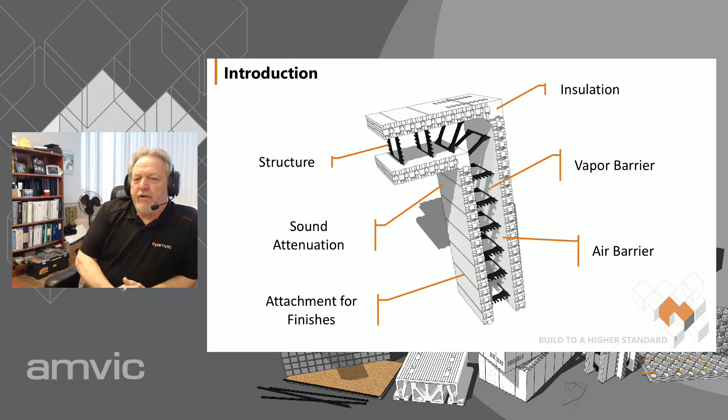Introductions. With our product, it's actually a stay-in-place form made of EPS products and the polypropylene webs. You get your structure basically from the concrete, the insulation value from the EPS on each panel, a sound attenuation, you get a vapor barrier, air barrier, and then you get the webs to fasten internally and externally.

ICF features: fire resistance, a 3-hour plus fire rating on our product, apparent sound transmission class 47 plus, thermal resistance. We have two different products. We have an R22 product and we have an R30 product. When it comes to holding to these webs, we have a 198-pound pull-out strength when using a coarse threaded screw.

We have one of the strongest factory assembled ICF with a fill rate capacity test with results of 865 pounds per square foot. Foam panel density is 1.5 pounds per cubic foot, and we have a fully reversible block with our patented form lock interlocking system, which has a full 1-inch depth.

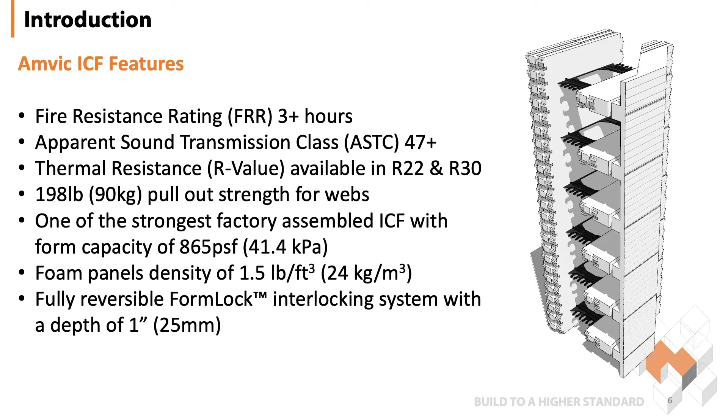R22 ICF is available in 4-inch, 6-inch, 8-inch, 10-inch, and 12-inch core sizes. The R30 forms are available in a 6-inch core and an 8-inch core. Typically, we have 45-degree corners, 90-degree corners, taper tops, brick ledge forms, and T-blocks. We can do factory cut radiuses when given the proper information.

Brick ledge extensions are available for forms that don't already have a brick ledge, and factory cut height adjusters to enable any height required on the job site. We also have accessories, and Plumwall bracing is available through Amvic.

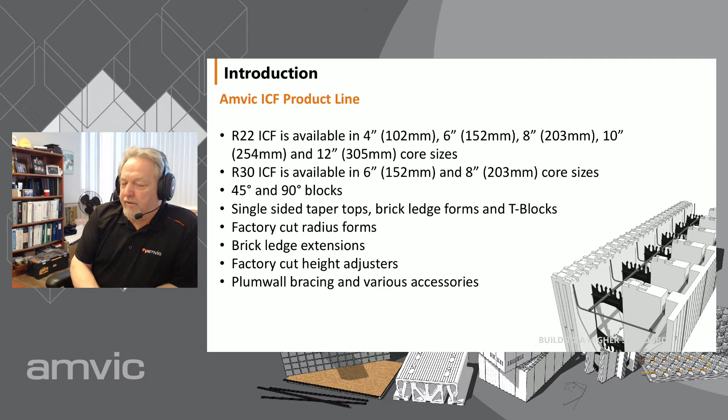45-degree block, straight form, 90-degree form. Just to give you some illustrations, a double taper top form. The T-block, we have a long and short version, which allows for the offset running bond as you go up through the build, and then our brick ledge form.

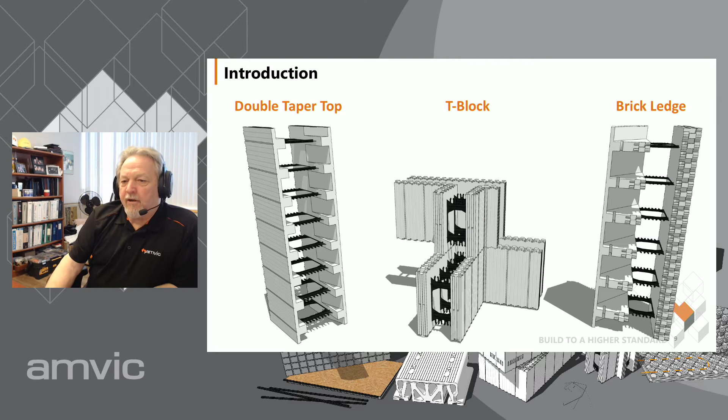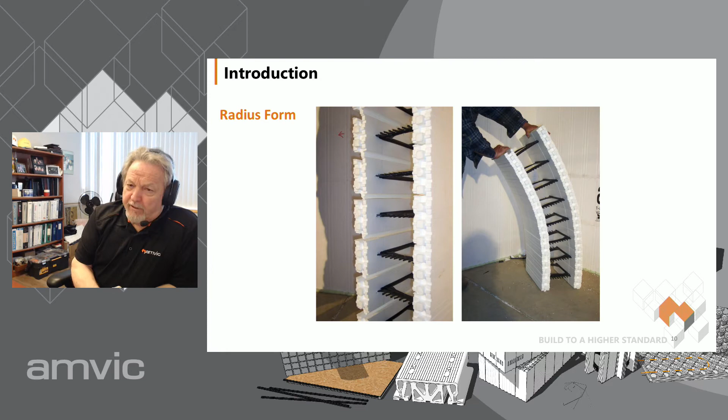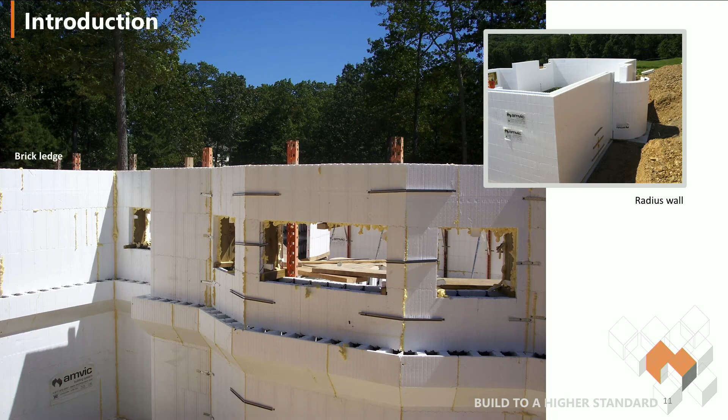We can also do the radius. As mentioned, you give us the actual radius of the walls in hand, and we can pre-cut it in the factory. It'll come flat shipped, and we'll create the radius on site. There's a quick idea on the brick ledges on the bottom left. We only have straight forms, so it means you have to miter cut those corners. And then there's a picture of a radius wall, just to give you an example.

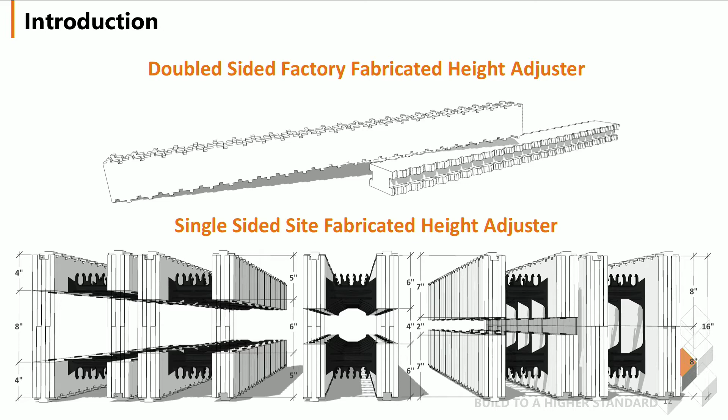We can supply double-sided factory fabricated height adjusters, and then you can also on-site cut to various different heights, and there's some examples on this slide as to how to cut them in order to get the interlock. When it's cut on site, you actually only get interlock on one side, so it's usually applied to the bottom or the top of the wall.

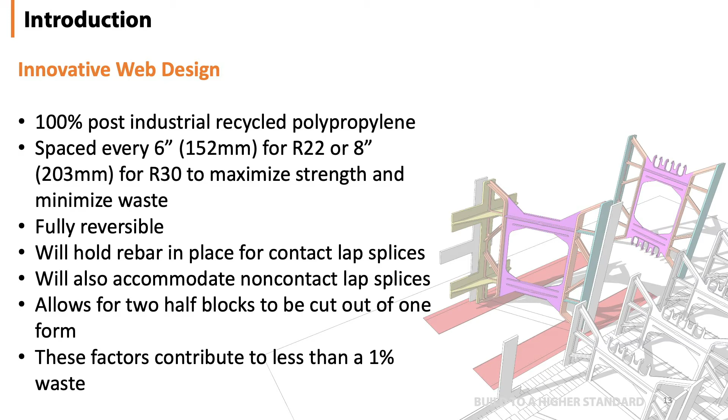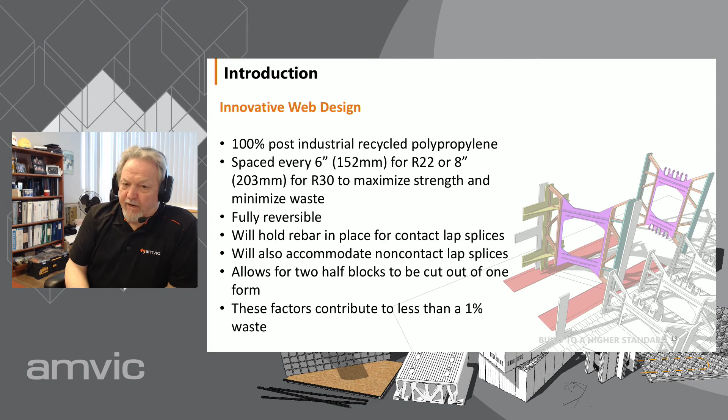We have an innovative web design, 100% post-industrial recycled polypropylene webs. They're spaced at 6-inch centers on our R22 form and 8-inch centers on our R30 form. Our blocks are fully reversible. The webs will hold the rebar in place for contact splices or a non-contact splice, which I'll get into later in the reinforcing section. And it allows for the blocks to be cut in half and to use the forms from either side. With all this taken into effect, we can actually get our waste factors down to about 1%.

Many different construction applications. When it comes to using ICF, we can do residential, commercial, institutional, industrial, or agricultural buildings. Building additions or retrofitting, crawl spaces underneath front porches, for instance. Exterior retaining walls and swimming pools have become very common. Single-story or high-rise buildings, multifamily, institutional, healthcare, retail buildings, or warehousing. They're all easily done using ICF products. With these buildings, we end up with a sustainable, resilient, and environmentally friendly building.

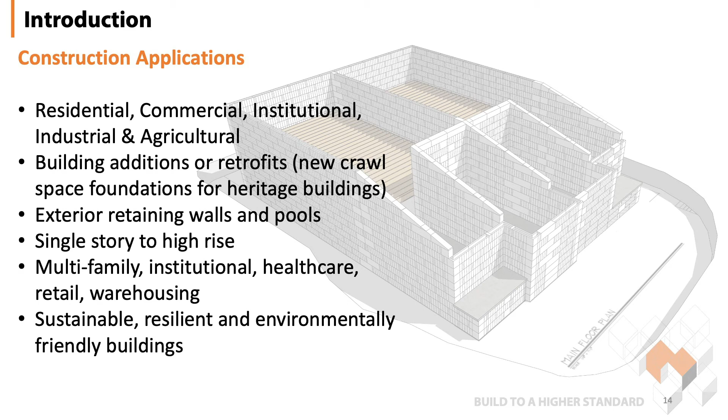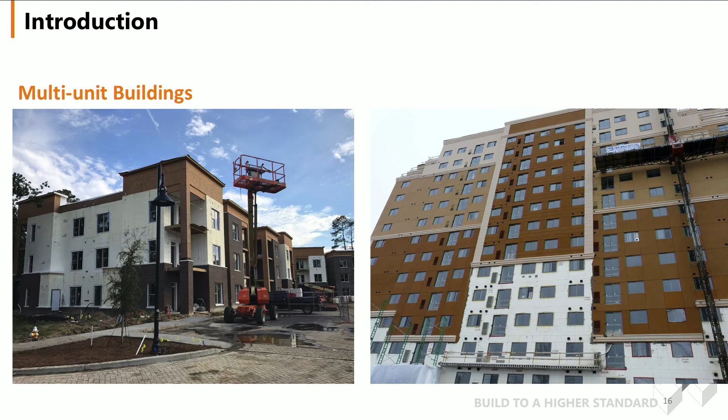Agricultural buildings, what we found with them is it tends to be very easily climate controlled completely using the ICF walls, so it gives them a much better ability to control how that building performs.

Certifications and evaluations. Amvic has gone through the process of being certified with the CCMC, Canadian Construction Materials Centre, on the Canadian side, the ICC, which is basically the American affiliate, and then we have the QAI for our quality control assurances.